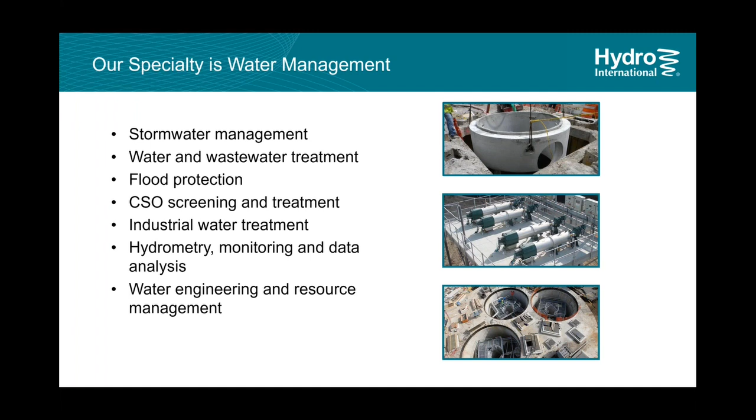So Hydro International has a lot of different divisions. I'm with the stormwater side of things. We do have a wastewater treatment side and industrial waste as well. We're truly an international company with thousands of installations all over the world. Our corporate offices are based in the UK, but our stormwater division for America Stormwater is based out of Portland, Maine, and then our wastewater division is on the other side of the country, just outside of Portland, Oregon.

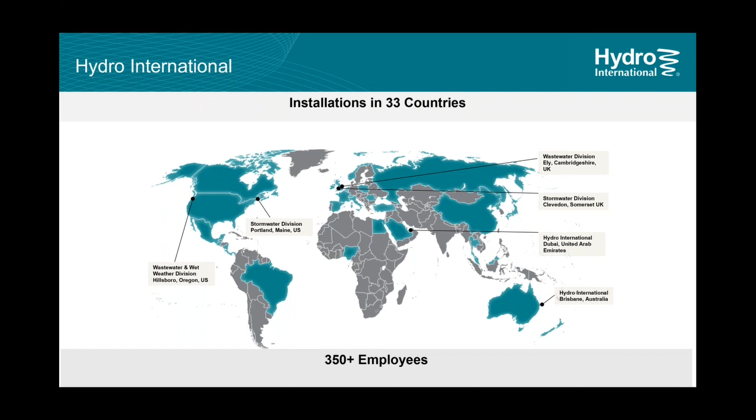One of the things that really separates us from a lot of the other companies is that we actually develop all of our own technologies and continue to improve on those technologies. We don't go out and buy other companies, we do all the development ourselves. And one of the things that's helped us is the fact that we have a world-class hydraulics laboratory back in Portland, Maine. And we've gotten very, very good over the years of learning what our products can do when it comes to removal of TSS, sediments, nutrients, phosphorus, and the like.

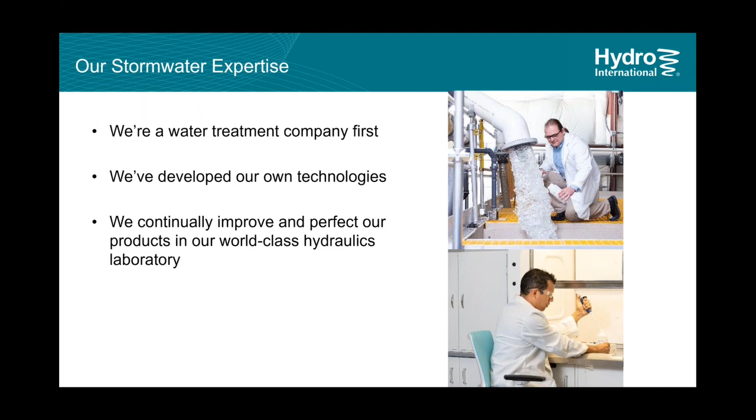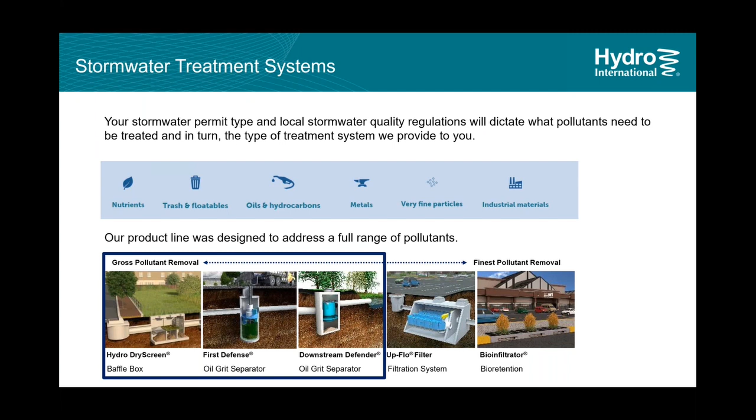But one of the things that we really hadn't concentrated on until a few years ago was the pollutant called trash. And it's becoming more and more of an issue, and we're now focusing more and more on making our water quality devices able to take care of the trash problem. We conducted our own field test of collecting trash, our trash test. We started that a few years ago, and I'm going to go into that a little bit later into this presentation and tell you about it, but we learned a lot from it. We have a vast array of different products to help you with different pollutants. So depending on what you're trying to accomplish, we would have the solution for you.

So we're going to talk about trash, and trash in general, I think everybody will agree, it's very unsightly. None of us like to drive down the street, see trash in the median or trash along the sidewalks. It poses a public health threat. We've got lots of illegal dumping going on. There's lots of homeless encampments with lots of trash. And that leads to breeding of rats that then transmit diseases to humans.

It also causes a lot of economic harm. Again, going to speak a lot about California, but in particular, Los Angeles is going to spend over $30 million this year cleaning up homeless encampments and illegal dumping. And it's not just Los Angeles, it's all over the state. And you look at all the cities combined, they're going to spend over $436 million this year just cleaning up trash.

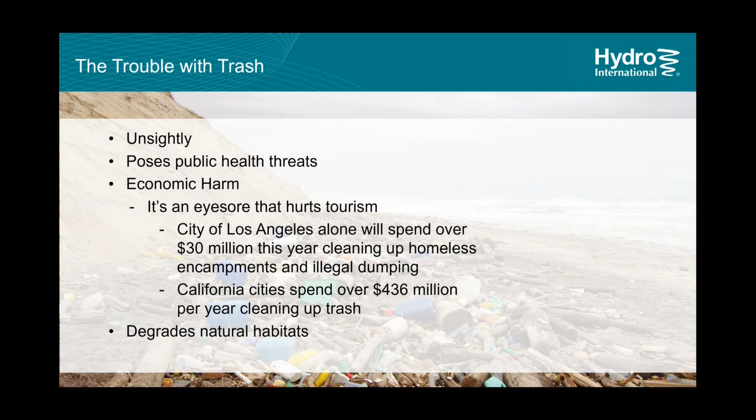So it's very much a big problem that we have to deal with. One of the main pollutants finding its way into the waterways and into the ocean is plastic. None of us like to see images like this, very disturbing, but it's something we have to recognize and put our heads around.

You might have seen and attended some of our past trash webinars, so some of these slides might be duplicates for you, but I find that the information is something we really need to share and be aware of. So here are some not-so-fun facts about trash.

Humans have produced over 18 trillion pounds of plastic since the 1950s. To put that in perspective, that's the size of 1 billion elephants. That's an awful lot of plastic.

18 billion pounds of trash end up in the ocean each year, and 70% of that trash is plastic. 80% of the trash in the water originates on land.

So what we really need to do is think of a way to capture this trash while it's on land, before it gets into the ocean. This last statistic, I don't want to think it's ever going to come true: if we continue on the trend we're on now and don't do anything about it, it's estimated that by 2050 there will be more plastic in the ocean than fish. That's a pretty scary statistic in my mind, and hopefully in yours as well.

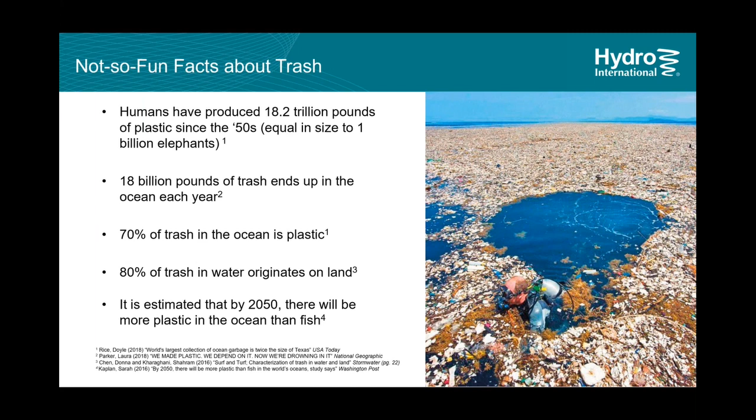You've all probably seen and read about these worldwide garbage patches that are accumulating and growing every year. The one I pay attention to the most is closest to me, off the Pacific coast between San Francisco and the Hawaiian Islands, the Great Pacific Garbage Patch. It's continuing to grow every year, and it's currently twice the size of Texas.

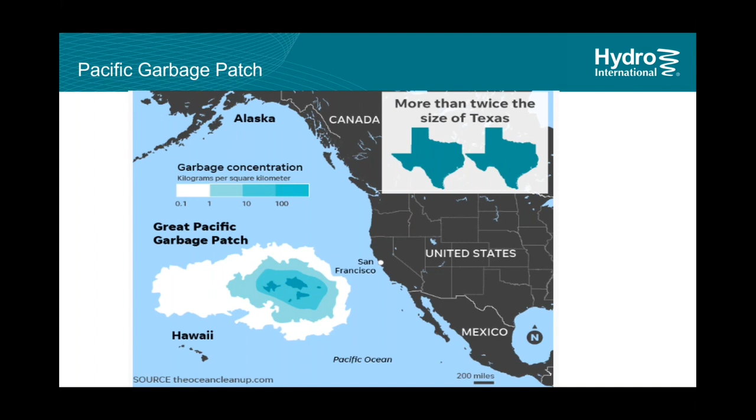You might have read about this Dutch inventor, Boyan Slat. He developed a prototype for a way to go out and clean up these garbage patches. If you're interested, you can go to theoceancleanup.com and read more about it. You probably heard that they did launch one of his prototypes out to the Great Pacific Garbage Patch, between California and Hawaii, 800 miles off the coast.

He raised about $40 million to get the initial effort going, but the cost to deploy 60 devices, he says, is going to be $360 million. That's not even including the cost of maintaining them, so the cost is going to be obviously much, much higher.

The other thing to consider with his program is that it's very experimental. He's learning as they go. They did their first prototype and hauled it out to the Great Pacific Garbage Patch last year and put it in place, and around New Year's this year, they went out to check on it.

They found that because of the waves, wind, and all the turbulence out in the middle of the ocean, it was too much for his system, and it actually dislocated a portion of it, allowing a lot of the plastics and trash they were capturing to escape. They also realized it wasn't moving as fast as the plastic being generated - it moves with the wind and tides, but the plastic and other trash was moving faster. So now they're bringing the prototype back in.

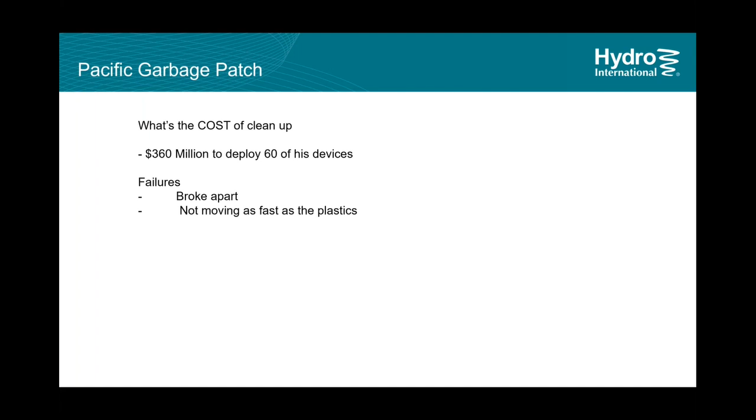They're going to be retrofitting it and making some changes, but the whole fact is that it is experimental - they're learning as they go. So at least somebody's doing something. They're coming out with some ideas, but we can see that cleaning up trash in the ocean is going to be extremely costly. So what are we doing about addressing the trash problem?

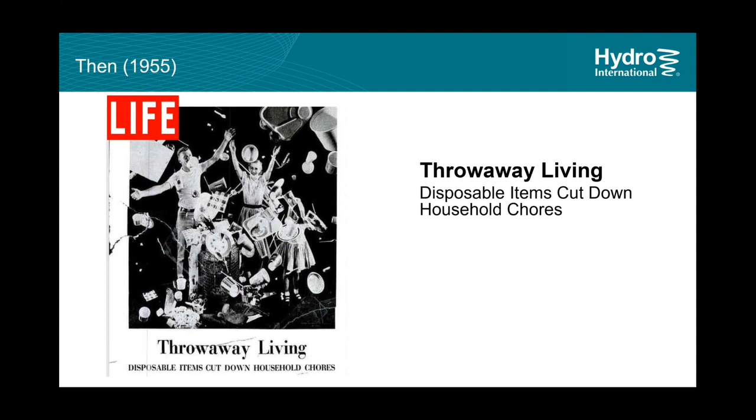If you look back to the 1950s, this is a magazine cover from Life magazine where everybody was celebrating plastics. It was going to be our life-saving deal - it was going to cut down on our household chores, and plastics were going to make us all a happy family, just like the family you see in the picture there.

You might even remember from the movie The Graduate in 1967, when Dustin Hoffman is graduating and contemplating his life and what he's going to do, and Mr...

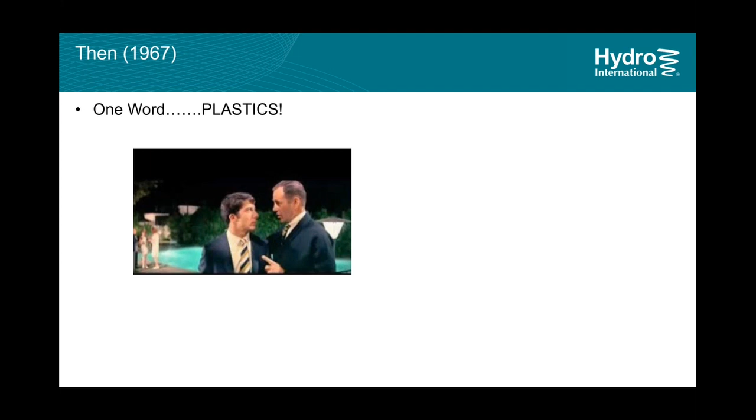McGuire grabs him out of the party and brings him outside by the pool and says, 'I have one word for you: plastics.' Plastics was looked at back in the 50s and 60s as the great future, and obviously it was a big future. Lots of business comes from plastics.

But if you jump forward now to 2020, you see a lot of bans on plastics. There's a lot more education and awareness of recycling and not using single-use plastics. There's a lot of places now, particularly where I live, where you don't even get the choice of a plastic bag anymore. It's becoming a thing of the past.

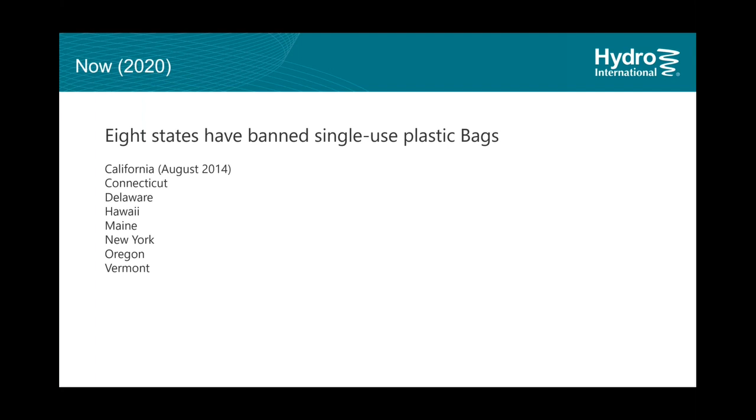If you look at some of the states that have banned single-use plastic, California was actually one of the very first, going back to 2014. But more and more states have followed. I think that if we were to have this webinar again in another two years, the list of states and cities banning single-use plastics is going to grow significantly. It'll be very interesting to see.

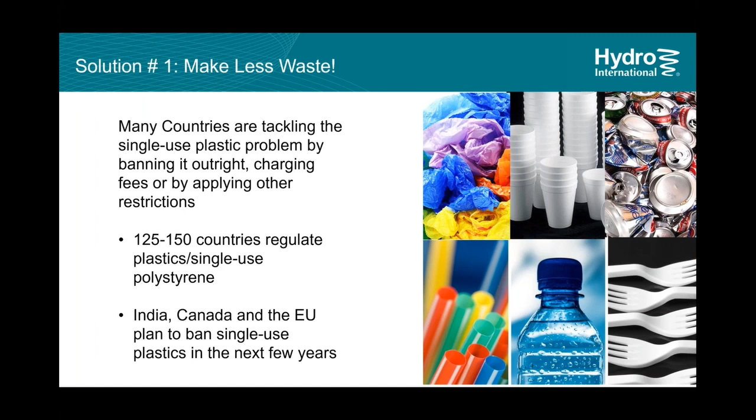So what do we do about plastics, or trash in general? What can we do about it? Solution number one would be to make less waste. More and more countries are tackling the single-use plastic problem by banning it outright. We're seeing more and more countries with plans like India, Canada, and the EU all planning on banning single-use plastics in the next few years, which I think is a good thing.

I'm going to launch a little poll here, and I want to get your feedback. I want to know: do you live in an area where there are any bans or fees associated with disposable plastic bags, straws, or cutlery? I'm going to launch that right now.

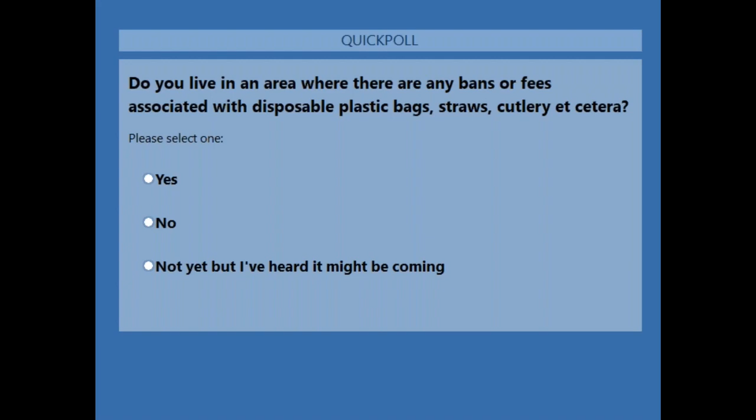And we'll share the results here. So sharing the results, looks like 46% say yes, there is some sort of a ban. 47% say no, and 8% say not yet, but it might be coming. So that's interesting. I just wrote that down. We've got 46% saying yes.

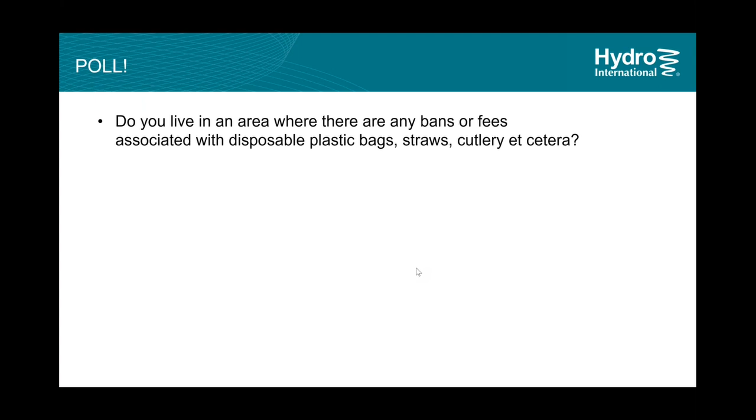Some technical difficulties. So interestingly, we did the same poll two years ago, and at that time we had 27% say yes. Compare that to this year, where we had 46% say yes. So I think what I was saying is that this is going to become more of a trend across the entire United States, and probably the world. That's pretty interesting.

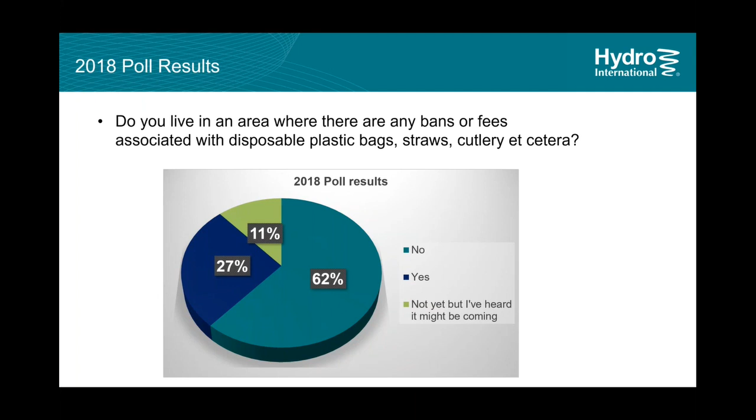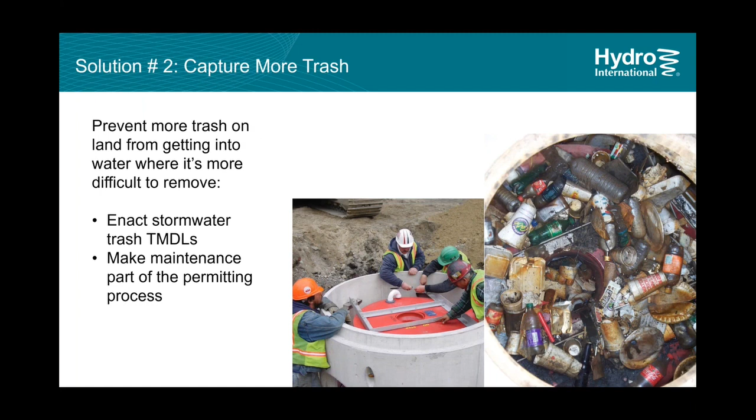One way to do that is to enact more trash TMDLs, much like California is doing, and I'm going to talk a lot about that in a couple more slides. But another thing is to make maintenance part of the permitting process. If you put any of these devices underground and do not maintain them, they are not going to be functioning as intended. So maintenance definitely has to be more of a priority.

So I'm going to launch a second poll here. I want to know: is there a trash TMDL in your area? In other words, when you're looking at using a unit, are you not just looking at TSS removal, but also thinking about trash, and is it becoming more of a regulatory thing in your area? So I'm launching the poll.

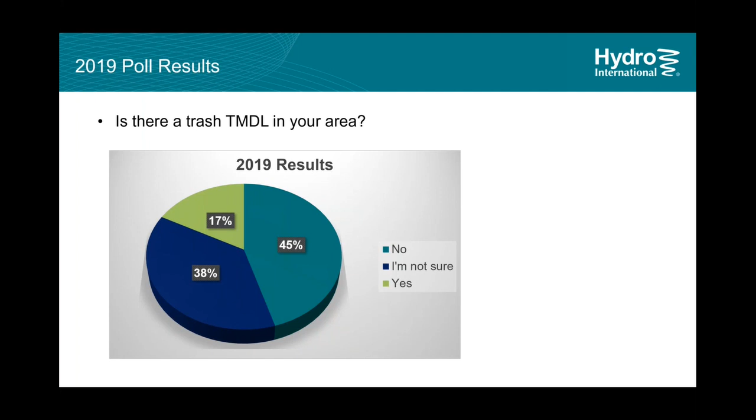It'll be interesting. I can't tell from the poll where geographically these answers are coming from. If you're in California, I would anticipate that's where most of these yeses are coming from, and maybe one of the other states that are talking about TMDL.

So I think that maybe in the next 2 years we do it again, I think there will be a much greater difference in those numbers.

So we talked about the problem, we talked about some solutions, but who's actually doing it right now? If you look at the full trash capture TMDLs, California right now has a statewide initiative for full trash capture. Every single city needs to be fully compliant by the year 2030.

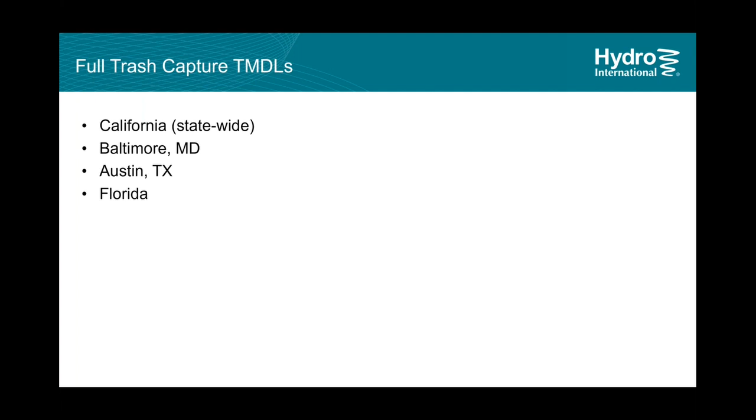But there are other areas in the country that also have a lot of TMDL usage and requirements. Baltimore, Austin, and Florida are some of them.

But California started back in 2015, where the State Water Board adopted and proposed the final proposal to the Water Quality Control Plan of how they were going to have each of the cities throughout the state meet zero TMDLs by the year 2030.

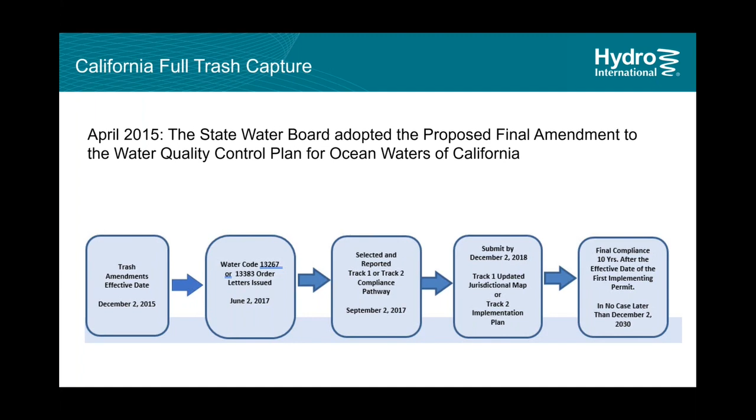And each of the cities had to have something turned in to the State Water Board by December of 2018. And what they did is they had to tell them which compliance pathway they were going to utilize to achieve that, either Track 1 or Track 2.

Track 1 is installing and operating and maintaining full trash capture systems that are approved by the state of California. Those are things like our Downstream Defender, DryScreen, and others.

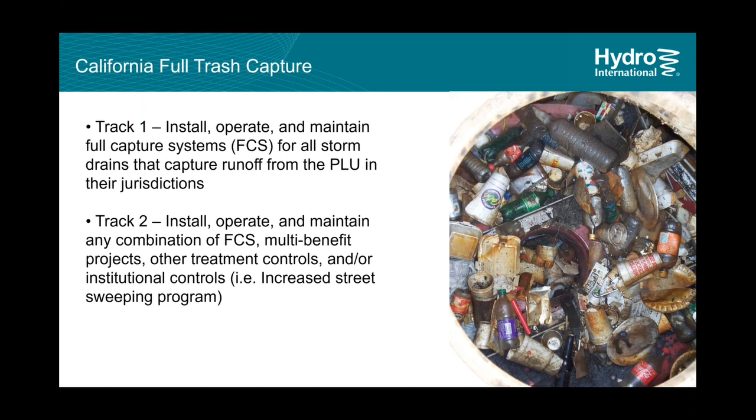Track 2 is kind of a combination. It's utilizing some of the full trash capture devices, but it's also using maybe multi-benefit projects like LID, bioswales, other pre-treatment devices in front of those, possibly putting screens on the front of curb inlets or drop-in inlet filters, or utilizing staff in the city to actually have more men on the street physically picking up trash, or increasing street sweeping. So that's just a combination going that direction.

And if you Google full trash capture in California, or full trash capture devices, you'll get to a page that will list all of the products that are approved. Currently with Hydro International, we have 3 of our products on the approved list for full trash capture: the Downstream Defender, the Hydro DryScreen, and the Up-Flo Filter.

Unfortunately, the state incorrectly categorized our Up-Flo Filter under catch basin inserts, when indeed it should be up above under high flow capacity trash devices. So we've notified them of that, and hopefully in the very near future they're going to move that.

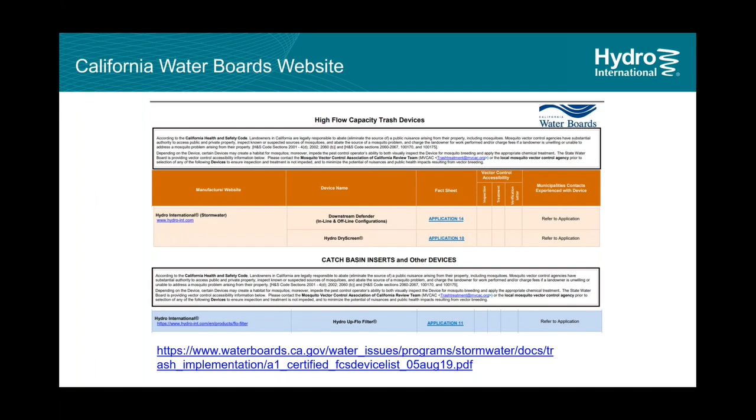So we looked at trash studies, and one of the first ones we could find was going back to 2012, where the Friends of Los Angeles River did a very thorough trash study. They collected all the trash, and then they took the time to actually separate it into different categories.

They took the time to put it into separate different categories so that they could figure out what were the real problem pollutants that they're dealing with in their area.

Very similar to that, the California Coastal Commission has their Coastal Cleanup Days where they go along the beach and collect trash. They do the same methodology, and they take it and break it into actual categories.

What they found is that the number 1 pollutant along the beaches in California is by far cigarette butts and filters. But interestingly, if you look at the rest of the trash that was collected, of the other 9 of the top 10, 7 of those all actually fall under the category of the food industry.

Fast foods, food wrappers, cups, plates, straws, and the like. If you actually combine all of those together, that's really close to the 37% that the cigarette butts are as well. So we're finding that the 2 main pollutants are cigarette butts and food.

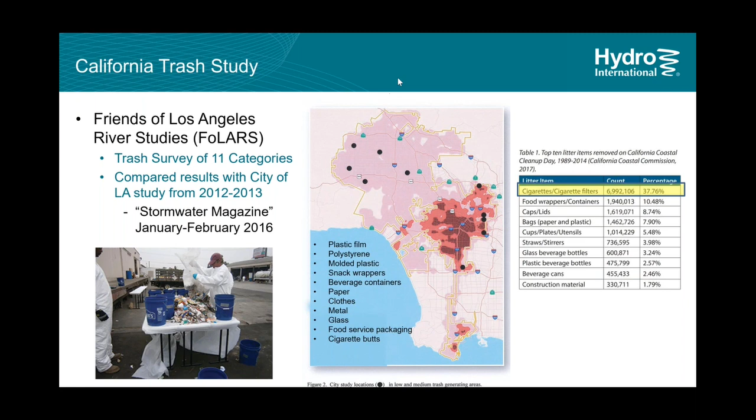So one of the things with California, to be approved for a full trash capture device, the requirement is that you have a 5mm screen or smaller, typically a stainless steel screen. The reason for the 5mm, which you can read about on the California site, is that the number one pollutant found for the California Coastal Commission was the cigarette butt, and a 5mm screen has the capability of capturing a cigarette butt and larger.

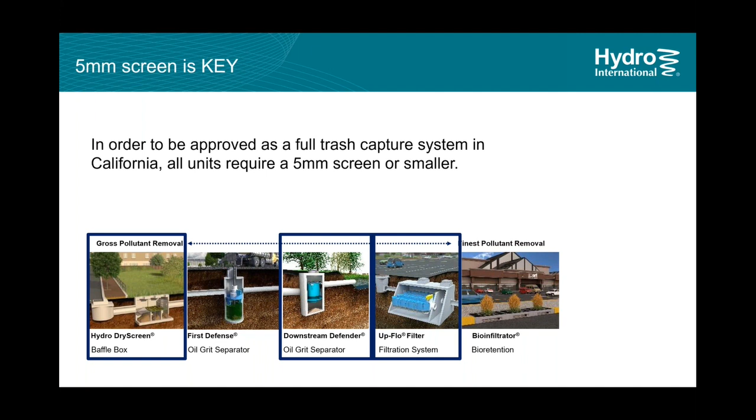We've got 3 of our devices on the list, and we'll have our First Defense approved very, very shortly. We just submitted that with a 5mm screen, so we will have 4 devices approved.

So I told you about our hydro trash study that we did on our own. This goes back to 2016, where we had volunteers just from Hydro International go out and collect trash, doing a study similar to what the Friends of Los Angeles River did. This taught us a lot about what trash is there, but it also gave us a lot of positive publicity with the public, who became more aware of what's going on with trash.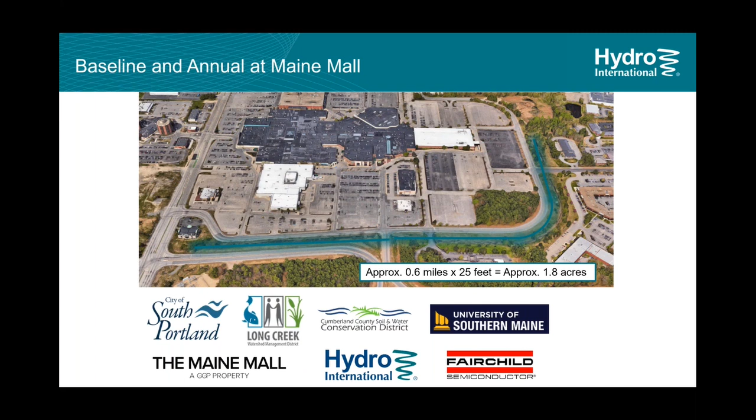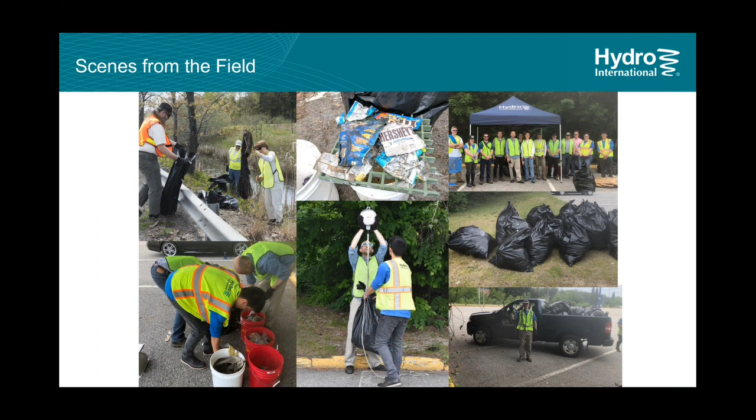We did this along Baseline and Annual at Maine Mall, on the southeast corner of the property, about 1.8 acres. These are scenes from the field of our staff out there collecting the trash, weighing it, taking the time to sort it, and then compiling our own results.

The following years were obviously less, since we kept going to the same place every time. If you guys are interested, I have a lot more slides on this trash study, and we'd be happy to share that data with you. Just let us know after the webinar.

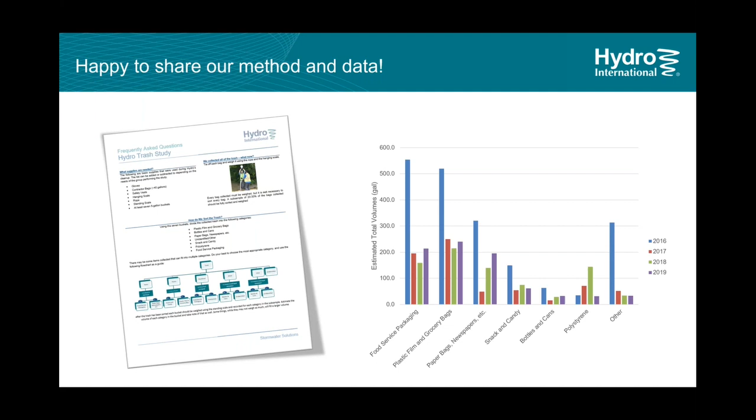So just to show you a couple of our products on the full trash capture approved list, and talk about why you'd use one over the other. This is our Hydro DryScreen. It's designed to remove sediment, nutrients, and trash, giving you one area of maintenance for a large amount of trash and debris, as opposed to having multiple drop-in inlets all over your city with multiple points of maintenance.

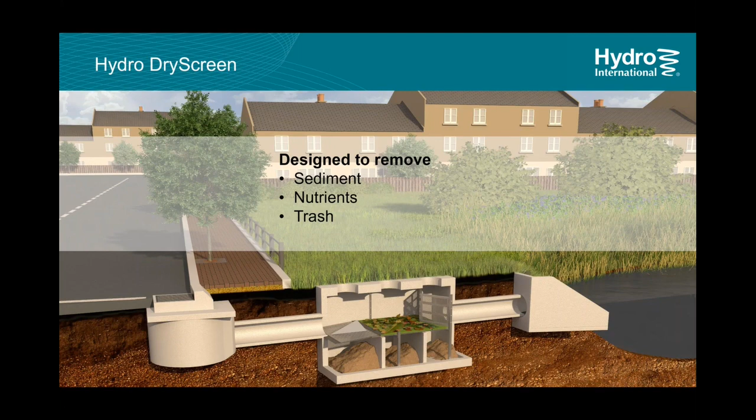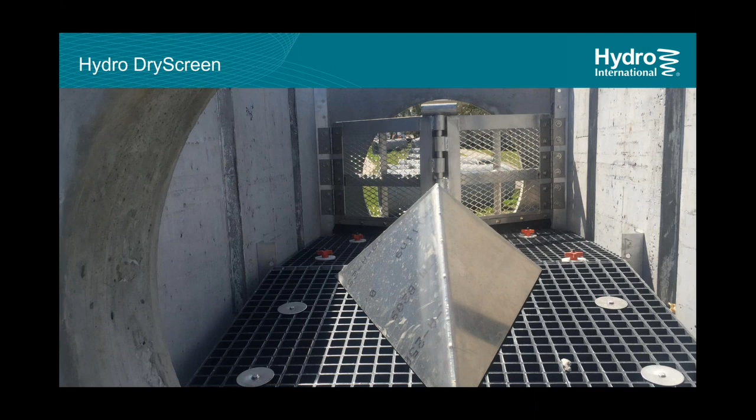You can find a low point where everything flows to and install one of these devices to capture a large amount. This is a look inside one of our Hydro DryScreens, and you can see the holes in this screen are much larger than 5mm. If you need a Hydro DryScreen specified for full trash capture, you just indicate that, and we'll install a 5mm stainless steel screen on both the vertical and horizontal sections. It's designed for large pipes, large peak flows, and works well in shallow areas.

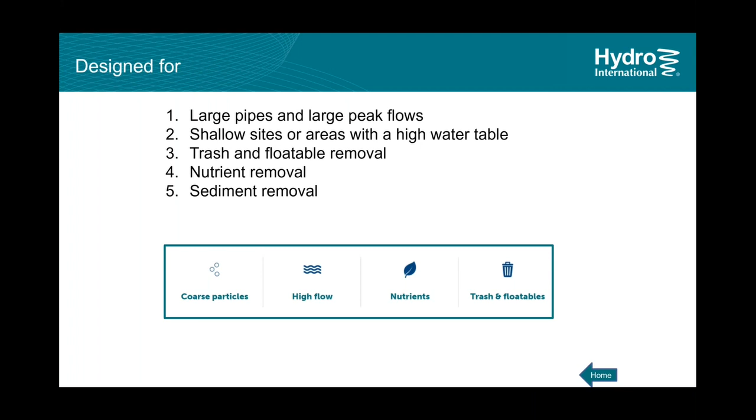Again, it provides trash and floatable removal, nutrient removal, and sediment removal. The reason you'd specify this over another device is that the large screen size lets you capture a lot more debris. The flow distribution plate, which I'll show in the next screen, allows you to use a lot more surface area and go longer between maintenance cycles.

The screen being up and out of the water allows all the natural organic material going in to not biodegrade down below in the water. It stays dry above the water line and doesn't cause nutrient pollution downstream. And as I said, it works very well with large pipes and large flows.

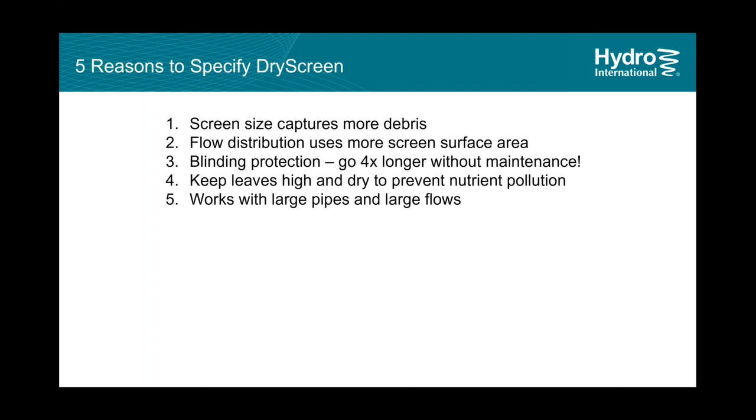That triangular shaped stainless steel plate at the front is our distribution plate. This allows the water to do two things. First, the water coming into the unit is slowed down a little bit, so it doesn't pulverize itself into the back screen. It also splits up the debris coming in, which keeps it from clogging one area as quickly.

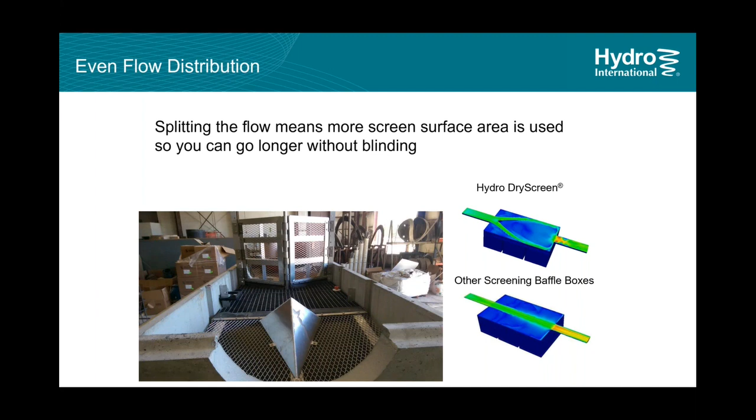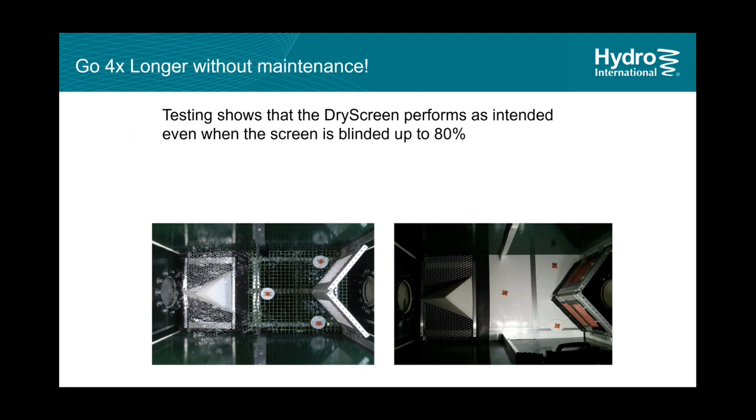We've done tests with blinding, purposely clogging the screen, as you can see in the picture on the right, where we've clogged it up to 80%, and we still find that the product performs as intended, even if it's not being maintained. And when it comes to maintenance, it's extremely easy to maintain.

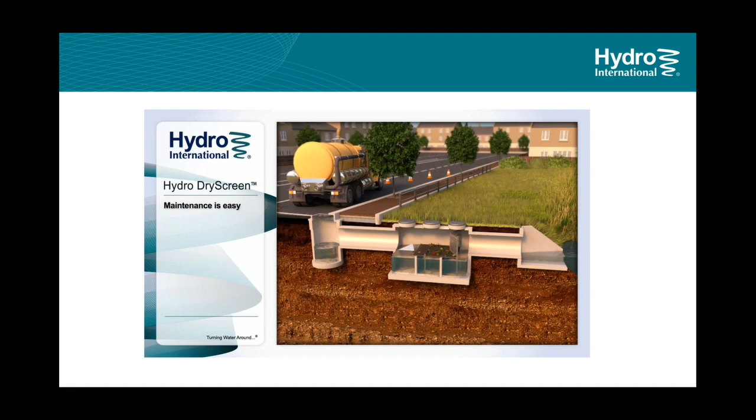A Vactor truck can come in, you have 3 access points to pop the manhole lids, and you get down in there and skim out anything on top of the screen. Each of those screens has a retractable hinge that allows it to flip up and gives you access into the sediment zone, where you clean out the sediments with the Vactor truck.

Now, if you don't have the footprint, or you don't have the large high flows, you might want to use something a little different, like our Downstream Defender. This is a hydrodynamic separator technology that allows you to go down to as small as a 4-foot diameter round manhole. So if you don't have the high flows or the large pipes, this might be a perfect solution for you and still meet full trash capture.

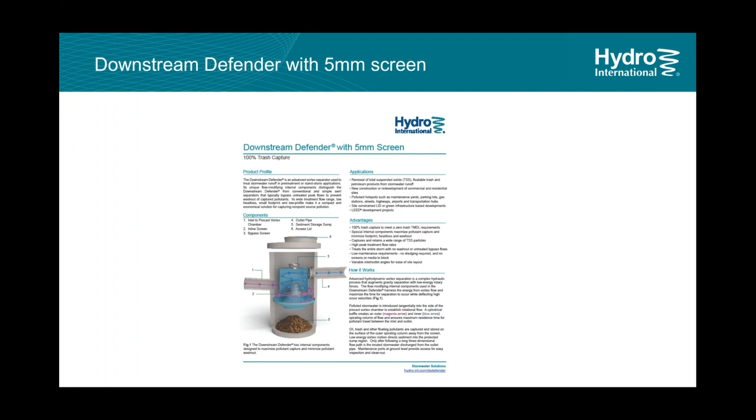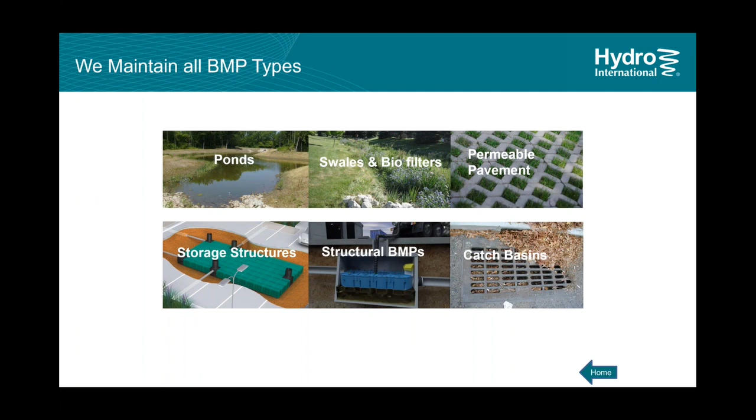Now, with any of these systems, when you go to put it underground, you have to think about maintaining it. If you don't maintain it, they're not going to perform as intended, even if it's a pond or a bioswale. Those are all things that still need to be maintained.

So if you're working with your client, or you are a municipality considering putting some of these devices in the ground, Hydro International has our own maintenance division. So if you need any cost estimates, or if you're looking for someone to actually do it, you can contact Hydro International, and we will be happy to provide you or your client with a quote.

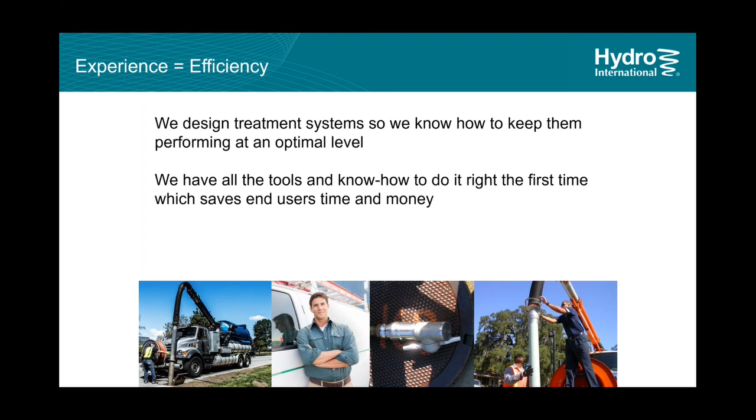So now we've talked about all of the problems, but in the end, what is it that we can do, all of us, to help eliminate trash?

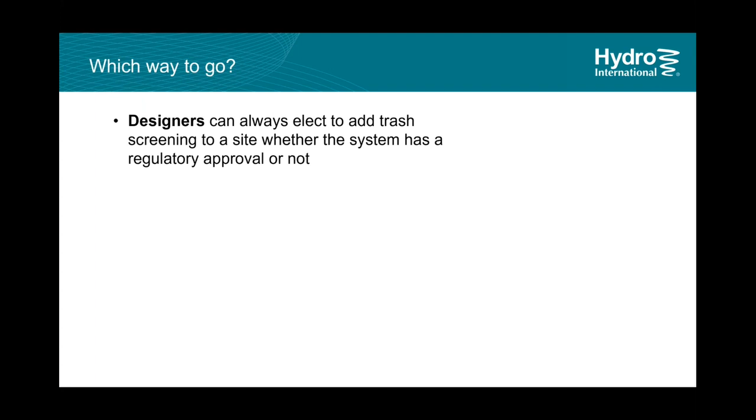Well, if you're a designer, you might be specifying or thinking about putting something in to remove TSS, but there's nothing to say you couldn't add a trash screen as well and get two bangs for the buck. Adding the screen, even if it's not required for regulatory approval in your area, can give you peace of mind as a designer that you're doing some good, and actually capturing trash on land before it makes its way to a waterway.

If you're a regulator, maybe you can do something similar to what California is doing and implement a trash TMDL, and talk about maintenance for those.

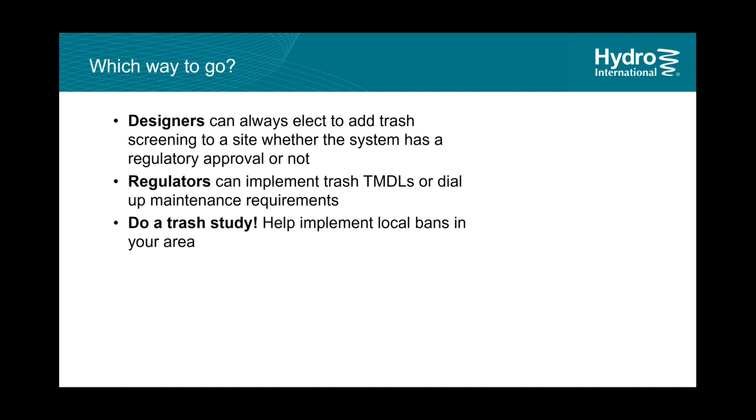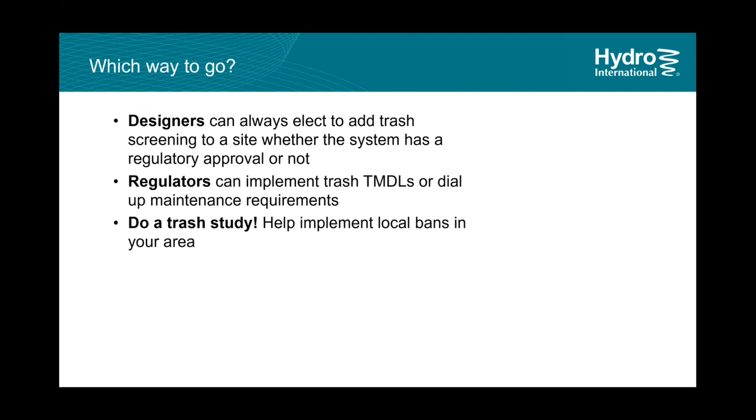And you could even do your own trash study, like we did. When we did our trash study, it helped us work with a local stormwater coordinator to actually get a ban on plastic bags in the Portland area. So if you do your own, maybe you can help implement similar bans in your area as well.